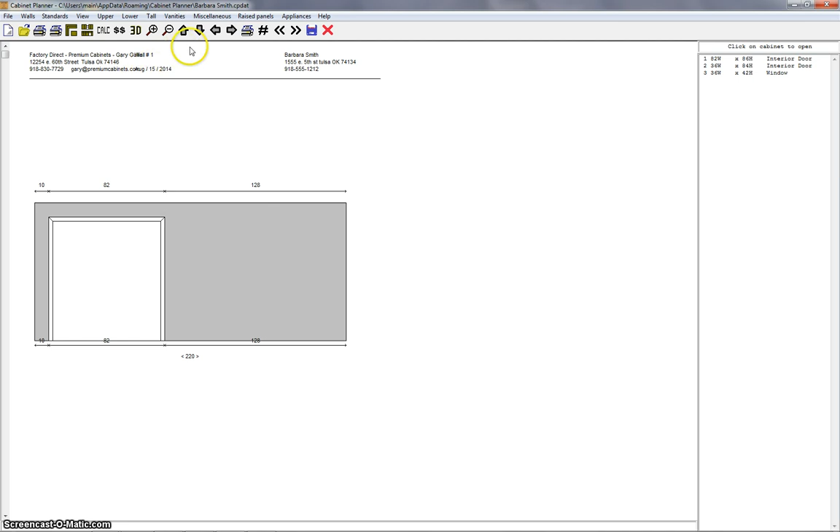Generally in most kitchens the customer wants their sink base centered underneath their window. Sink bases come in sizes going from usually 30 inches up to 42 inches. Most of the time the biggest sink base is 36. The standard sinks that are made are usually 31, and they will all work in 33s and 36-inch sink bases that we'll utilize. So let's just start with, go to lower cabinets up here.

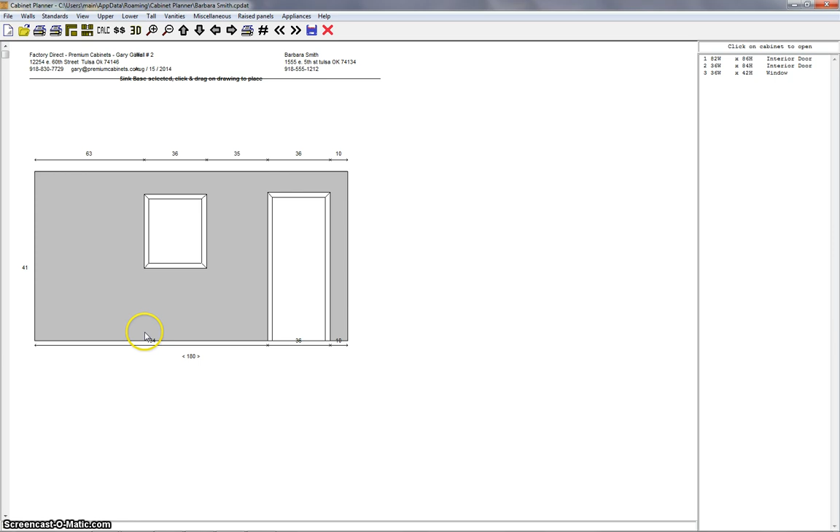Drop down to sink base, and you can see here on the location it says right down here where this marker is on the location, and we see this is right at 63. So we're going to drop down here, make a 36-inch sink base. Again, I overdid it, 37, change it to 36, and its location starting point, which is right here, says 63.

Save. One thing I would like to point out here, these are false, there's not drawers in here.

Then I like to put, one of the things that we didn't cover on standards was when you go to general standards, there's a place here for either knobs or pulls. What you're finding, most people are choosing pulls, which are more like handles than knobs, and so you put K or P in there. These are P, and save as default. It'll always put the on the doors, it'll always put the handles. And then on the other standards, drawer standards, the same option will come up as far as pulls or knobs. You want to select the P, save as default, and so you've got that set up.

Now dishwashers are usually 24 inches wide, and they have to be next to the sink base usually. Only in special situations are they not, and it's usually because it's a really small kitchen and you have to put it on a different wall.

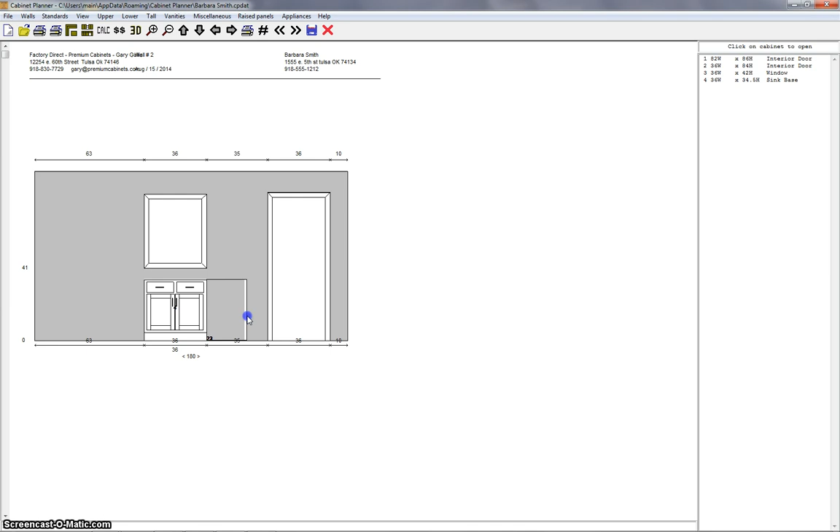But go to appliances and select dishwasher. Most dishwashers are a standard 24 inches wide. It's a terrible color, so we're going to change it to stainless, and it's right next to it.

We're going to go to the island for just a second. In an island, you'll see the wall is not elevated like when we set it up. We zeroed it down, so you can go to lower cabinet.

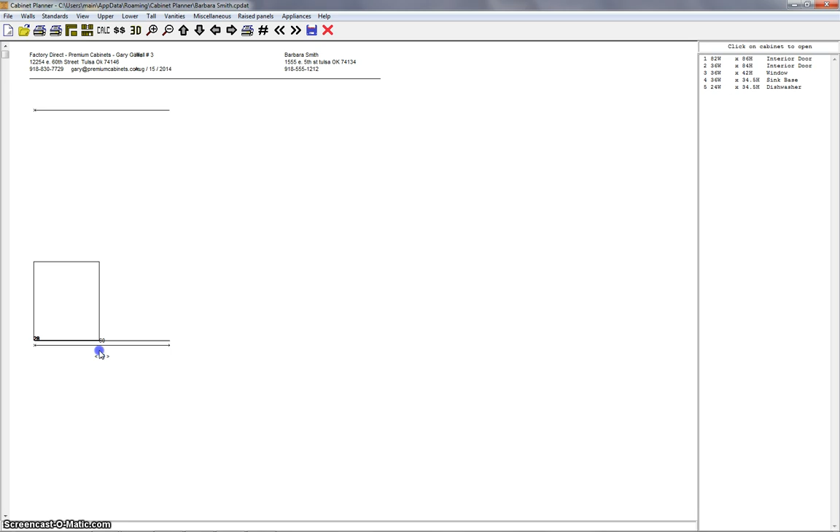Let's say we want a drawer base in the island. Drawer bases run from standard anywhere from 12 inches to 30 inches. We're just going to put a 30-inch island on one side, hit OK, save, and on the other side, lower, we're going to put one drawer, two door openings. Okay, save.

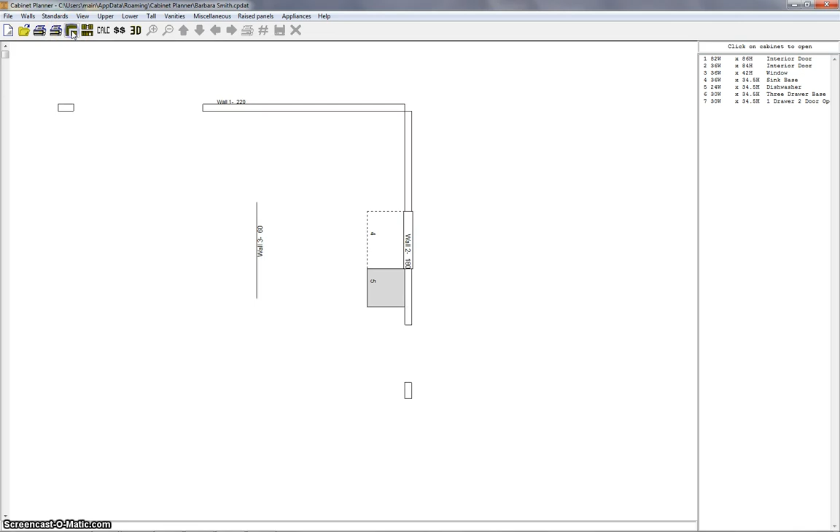If you want to see what we've done so far in the overhead view, this is what it looks like. The other option to see what it looks like is the 3D rendering. This is probably the most popular feature on Cabinet Planner.

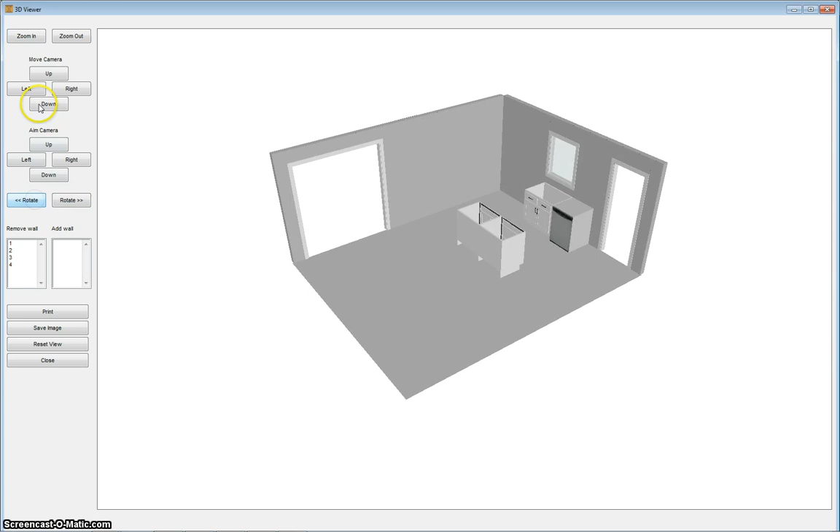If you have a better graphics card on your computer, it's always better. But you can see how your progress has started. You can zoom into the job, up, down, move your camera right and left, so you can kind of see your progress as you're going on. The best thing about the 3D imaging is it lets you see your mistakes very glaringly.

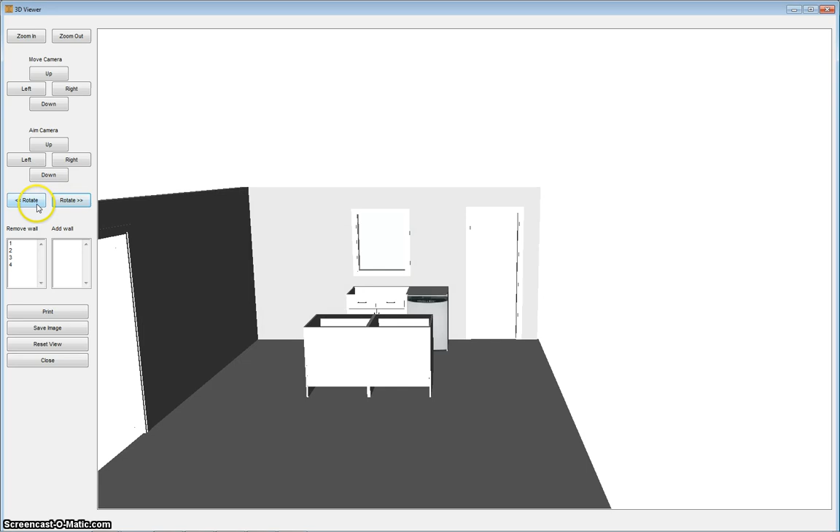We'll mess more with 3D later, but you're seeing how the cabinets are being dropped into place right here. Exit out of that button.

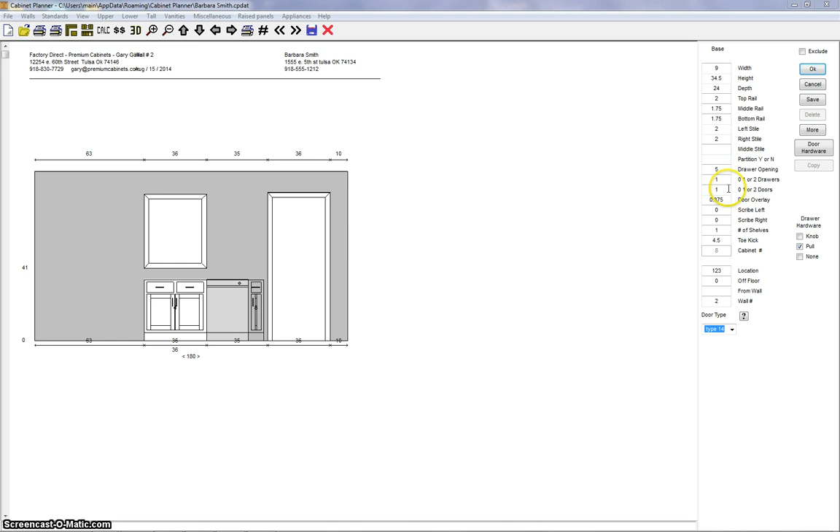Upper cabinets between, it looks like down here on the lower where we have about a 10-inch opening. We can drop a 9-inch cabinet down there. The best way to do this, not every catalog offers the 9-inch drawer on the top of the cabinet, so you could just put 0 drawers.

Like that. And then for the upper cabinets, we have 35 inches between the 2 doors. We're not going to use all of that 35 inches.

So this is going to the ceiling. If we wanted to lower it and have shorter cabinets, if they have a soffit, it's a square box that comes down from the ceiling, and you have to put your cabinets underneath it. I'm just going to use it at 30 inches for right now to help you. But we have some space between the doorway and the cabinet, and we have some space between the window and the cabinet.

And now you put the crown molding on it. The crown molding helps show the appearance better.

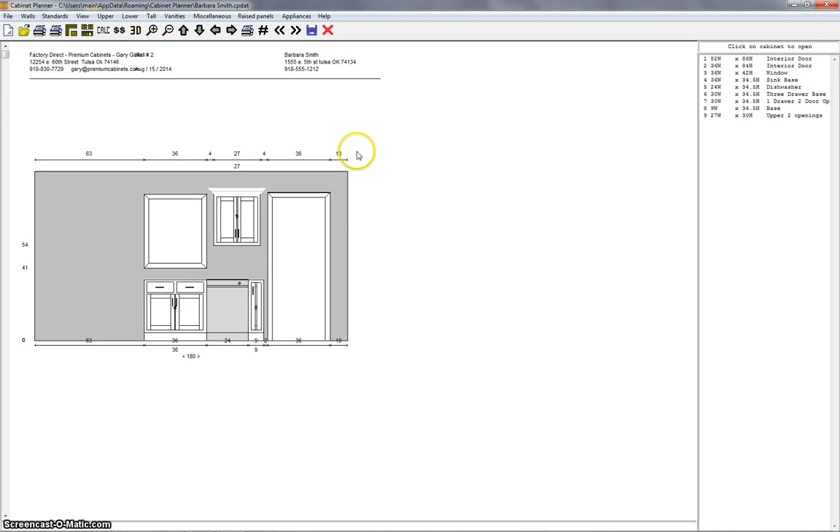That's basic cabinet setup. And again, if you don't like where it's setting, you can totally adjust it left or right. The next session will cover corner cabinets.